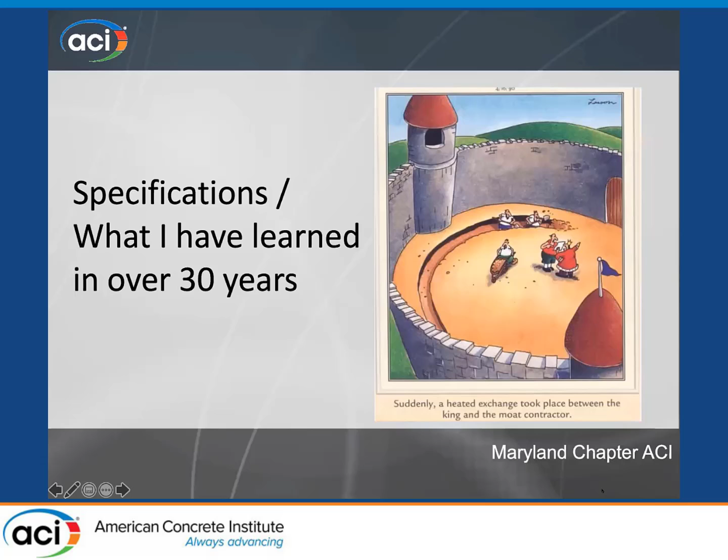When you take a look at this old cartoon, suddenly a heated exchange took place between the king and the moat contractor. They're building the moat inside. I've written a couple of these specifications that ended up with the moat inside the castle. I've seen a couple other ones. And I want to go through kind of some case studies of history of the things that I've seen and kind of how that shaped my mind about how specifications should be written. And hopefully it's interesting.

So I started my career off here at Maryland State Highway Administration, I guess professional career after I became an engineer. I did a lot of work in construction before that, and a lot of my family are contractors. So I kind of grew up in the business, but my real professional career started here, and it's a really good place to start for any young engineer. You get a lot of experience from a variety of different types of applications, soil, asphalt, concrete, and I ended up kind of by mistake into the concrete world.

I guess many of us could sit here saying, you know, when you're 5 years old, you didn't say one year I'm going to be a concrete engineer, and that's what I'm going to guide my life toward. You kind of fall into it and find out it's a good thing.

How long ago was that? Well, it's that long ago. Every one of these gray hairs in my head is a specification that I've written that somebody isn't following today.

Now, I'm not this old. I wasn't around when they did the great roads back in the 50s and the Eisenhower highway system was built. But the guys that taught me were largely around at this time, early on, the old state guys when I came on board. And they had grown up in the Wild West. When they were building these roads and the beginnings of it, there weren't a whole lot of specifications. And the ones that were written, there wasn't a lot of enforcement of it. And a lot of things were being done that were being done improperly. And these guys were tough, but they were tough because they lived through some interesting times. And they had to write the specifications, and they had to make sure that they were enforced properly in order to build the roads that we enjoy today.

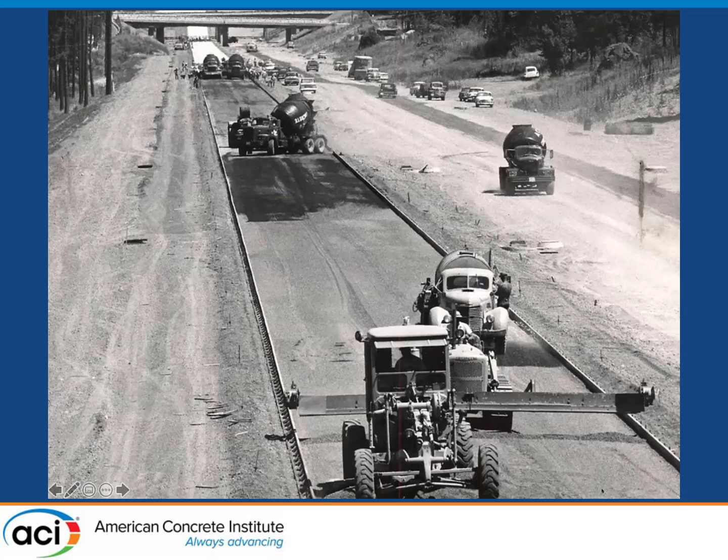And I have a tremendous amount of respect for them. But early on, these guys really shaped how I thought about how a specification should be written and how it should be enforced. And it was very black and white. It was, these are the specifications.

This is the old Maryland State Highway spec. It's actually a little bit updated. I think we only had about 8 mixes when I worked there. The specification was 90210. And for years, I told everybody, and still do, that I wrote for 90210.

And so a young engineer came in. I'm in the materials section. I'm going to work there until something better comes along because I really want to be a design engineer. And they teach me these specifications and they get you to memorize them. And I worked in materials, so they're very much into what the material should be. And then they send me for a year out in construction to see how these specifications are used out in the real world.

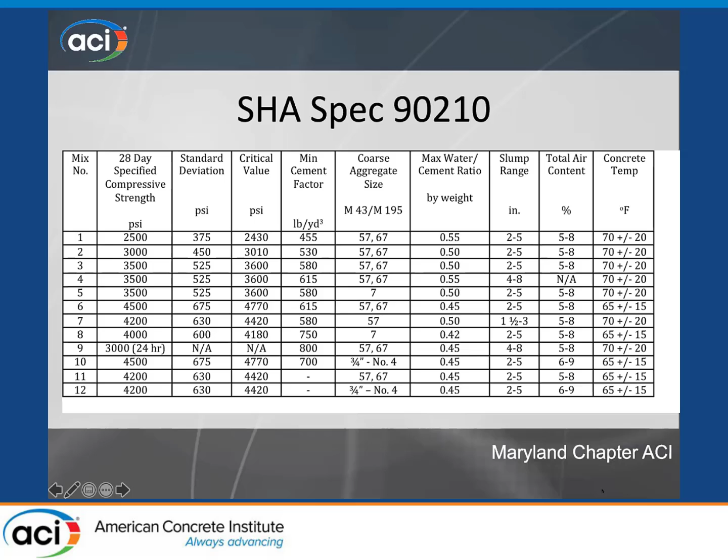So my first month out in construction, you really, unfortunately, and this is true to today, most engineering programs do not teach you a whole lot about concrete and the tests for concrete and what they mean and their importance.

So one of the engineers at the field office, State Highway, took me out on this job. It was out on I-97, if you're familiar with Maryland, right up around Annapolis. He took a slump cone out, and with no concrete at all, standing in the parking lot, he said, 'This is how you run a slump.' He just showed me very quickly how to do it. He gave me a slump cone, a rod, and a tape measure, and sent me out to inspect the footing.

He said, the concrete trucks are going to come. When they come, you run a slump. You know what they need to be within. And if they're out of spec, you send them home.

So the first truck pulled up and I measured the slump, and it was a half inch over the specified maximum. I told the truck driver, okay, get it out of here, it's out of spec. Now, I think they're not sending me out to anything important because I'm a new guy and I really don't know what I'm doing. It was probably a foundation for a signpost or something like that. And I'm all by myself with one other guy doing this.

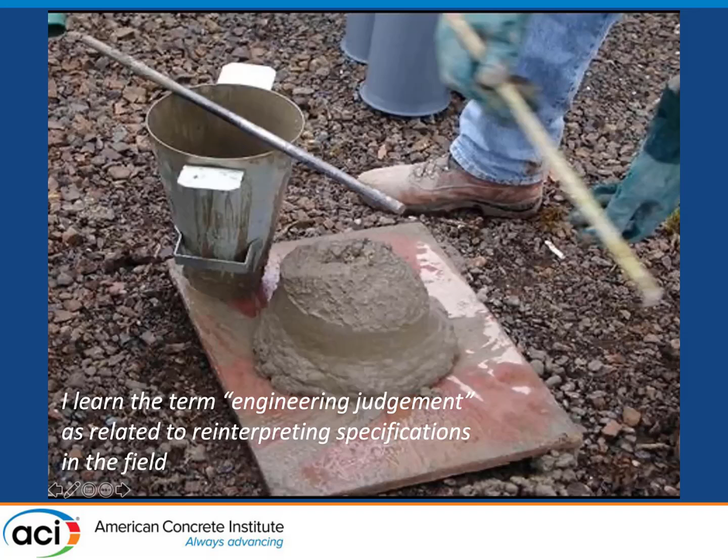So I guess at a very early time, I started to take a look at these specifications and saying, there's some wiggle room in them. And could this have been written more clearly for the application that I was looking at? It just starts you to wonder.

Came back and I started to work in research, and we had a very interesting project that really is the thing that pushed me onto my career as a concrete engineer. This project was, we were experiencing a lot of bridge deck cracking, and it was early on, and they were mostly transverse. You would have, on the worst decks, one every foot. Usually you'd have a longitudinal crack that went down. So my job was to go out and measure all these cracks in the bridges, map them out, and try to determine what was causing them.

So I wrote a report on it. My recommendation coming out of the report was based on me talking to every one of the older engineers that I knew and explaining what was going on. So when I say it was my recommendations, it was really a lot of smart guys that were helping me out with this. But we collectively felt that there was a curing problem going on.

And so I talked to some of the other state highways to find out what they were doing. And I came back with — there's a method of curing, and it's called fogging. And we really should be getting into that and see if that'll straighten things out. So they said, that's great, go write a specification on it.

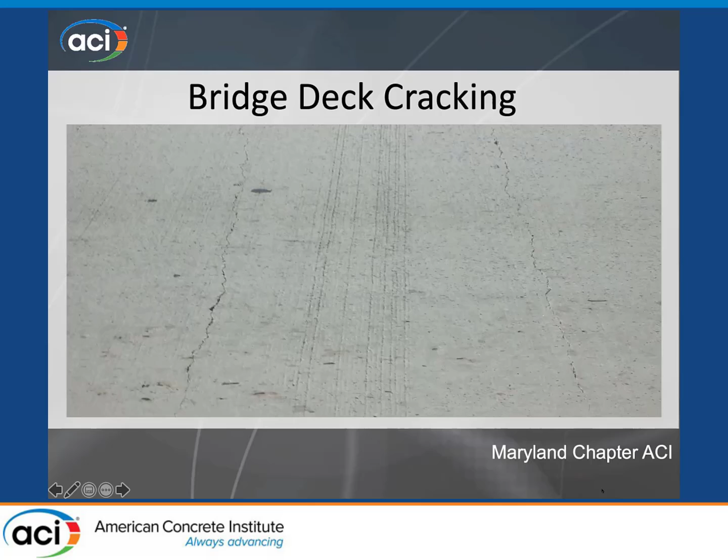So I did. And this is what was in my mind when I wrote this specification. I think I had something about atomized water molecules flying out of the thing and creating a mist over the concrete, a fog, raising the humidity above the concrete. I had all this stuff in it, and I just thought it was great.

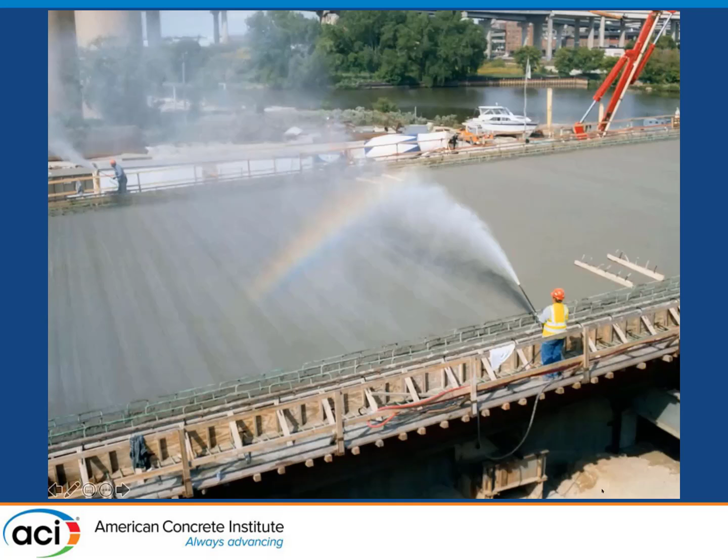And my first spec didn't really go so well, because when I went out to see if people were actually doing this, I found out that mostly people were using garden hoses and calling that an atomized spray.

I went out on every bridge deck over a 4-year period that was placed in Maryland, and you walk out on the job and tell people, no, this isn't what I intended. And they go, well, that's interesting. What do you mean by atomized? Can you tell me what that is? And they started to pick that specification apart. I realized that what I had written was really not very good. It was confusing to everybody, and it was open to interpretation from the contractor that could take us down some bad roads, where they were really adding a lot of water to the surface of the concrete and doing bad things to it.

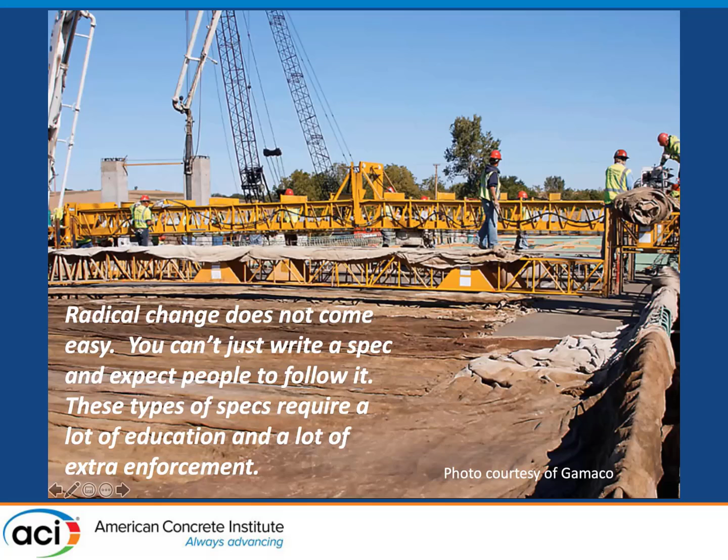Another thing I found out, we had a guy come in who was a very good salesman, and he sold us on superplasticizers, high range water reducers. These were the old style, old generation high ranges - melamines and naphthalenes. Some of them worked good, and some actually worked not so good. His product didn't work very well. But he sold us on it, and we did a little work and it looked good in the lab. When we got it out in the field, it was a disaster. We had horrible slump loss - it would come flowing out of the truck into a wheelbarrow and start to lose slump immediately. It was a nightmare.

I sat out on a couple of those projects, and we wrote high range water reducers out of our specifications. Now it's 30 years since then, and high ranges are still largely prohibited for use in Maryland. I guess that was another thing I learned that helped put me on the side of the fence I'm on today. You need to really know your product, have faith in it, and be very truthful about what it can and can't do. Because if you recommend something and tell people to do it and it doesn't work out, you'll lose your credibility, and you'll probably lose your chance of ever getting back in and doing that again.

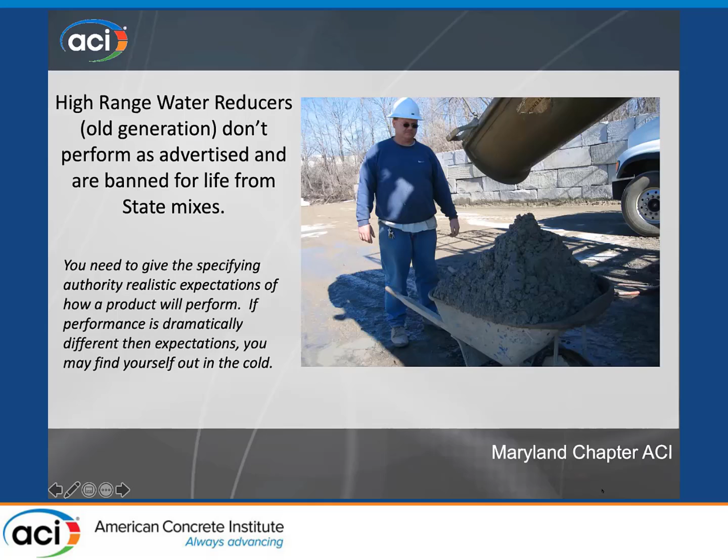When I was with the state, we discovered ASR, which had actually been discovered 45 years before us. I remember I was going to night school at the time, and my professor asked if anybody knew what ASR was. Nobody did. He offered extra credit if we could find out whether we had a problem in Maryland.

I went back and talked to all the guys in the lab - I was still one of the real young guys - and they told me yeah, they knew what ASR was, and explained it to me. But they said Maryland doesn't have ASR, we don't have reactive aggregates, it wasn't a problem. I went back and talked to my professor, and he said, well, you told me what it was, but I'm not giving you any points because I'm being sued right now. He was working on the Washington Metro project, and they were finding ASR all over the place, and they're saying he should have known about it.

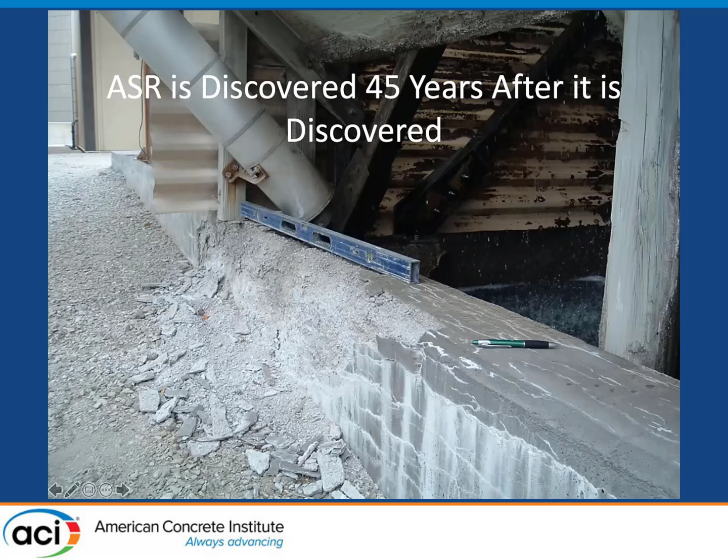So I wasn't the genesis for this, but shortly after, we did find out we had ASR, and we found it in the highest inland bridge in Maryland, Route 68 and Maryland Route 55. This thing towers above the road below - the worst place in the world you could find this problem. They had noticed all the cracking in the deck, ripped the deck up, and redecked it. Shortly after doing this, I'd guess within a 10-year period, they started to see this cracking problem again - that was ASR.

So everybody was spinning around asking, what do we do? I remember somebody wrote a specification saying we will not use any Portland cement where the alkalis are above 0.60. The very next day, we had about four lawyers with four producers of cement in the chief's office ready to sue us for that. So everybody said, okay, we're going to step back from that. Because when you work for the state, you really don't want to get sued - it ends up in the newspapers. You don't want to get sued unless you're dead sure of something, and we weren't dead sure of this.

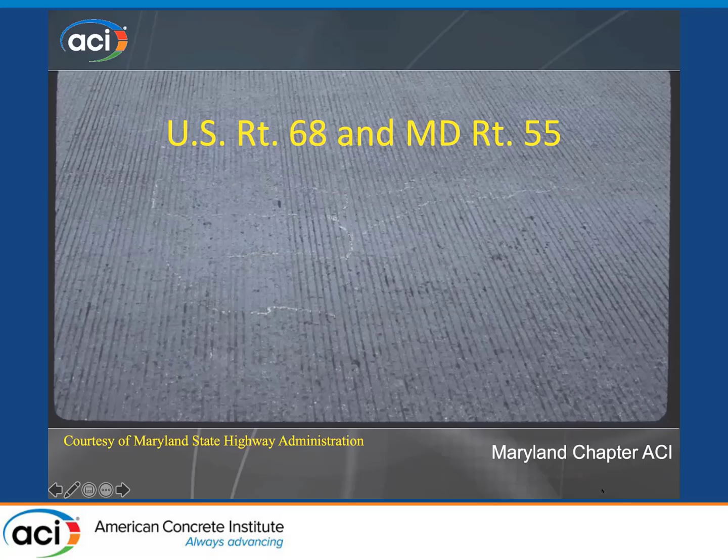So we went back, and there was a Mid-Atlantic Technical Committee in Maryland. If you look at that committee, you'll find Calvin McCall - I think he's behind Einstein somewhere and in front of Schrodinger. Anyhow, very smart people were there. I didn't know Calvin at the time, but I was reading all the notes from the meeting.

We had a real smart guy from our side, John Wiesner, that was involved in that. And these guys wrote a really good guide for how to deal with ASR.

And it was a good time for the industry, because for a short period of time in the Mid-Atlantic, everybody was kind of in agreement about how to address ASR. There were some small differences, but everybody was pretty much on the same page. And it's important for concrete suppliers, producers, and contractors to have consistency in major specifications across the region.

We have kind of a mess today because it's a lot different, but if every state has its own specification, if you live in a small state like Delaware or Maryland and you're a concrete producer, you might do work in 4 different states very easily. And if you're a contractor, you definitely will be doing work across state lines. If you have these big differences in a specification, it becomes a complete nightmare.

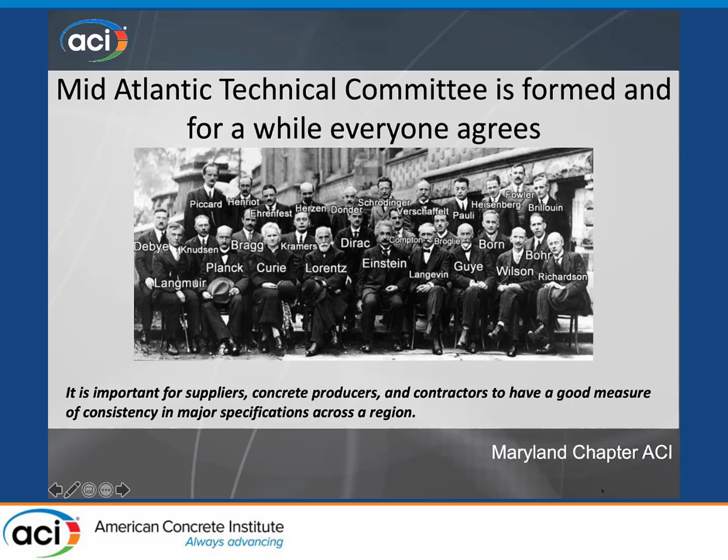I don't have any pictures of Calvin. And that is amazing. When I went through my book, I guess we had some pictures at one time, and we agreed that they were of an incriminating fashion, and we needed to get rid of them. Nobody needed to see us with glassy eyes and cocktails in our hands late at night. So I actually do have those pictures, but I'm not sharing them.

I threw in this one of Calvin and me, early days. Calvin has a tear in his eye, as I do. Blue Circle Cement. I left the state.

I went to work for these guys. I kind of knew what I was doing as far as how to build a bridge and how to build a highway. I didn't know a whole lot more than that. I had a lot to learn.

And early on, I don't know if Calvin remembers this or not, we shared a rental car together. We were up in Albany, New York, and we were driving down to Ravena. I got in the car with Calvin, and we started to drive, and Calvin started to talk.

And I realized that Calvin was one of these smart guys that you really, really wanted to know and become friends with. I don't know if Calvin remembers this either, but he told me, you seem like a nice guy. I'm not sure if we're going to be friends or not, but I will do anything I can to help you. And I am very glad to say we are friends, and we always have been.

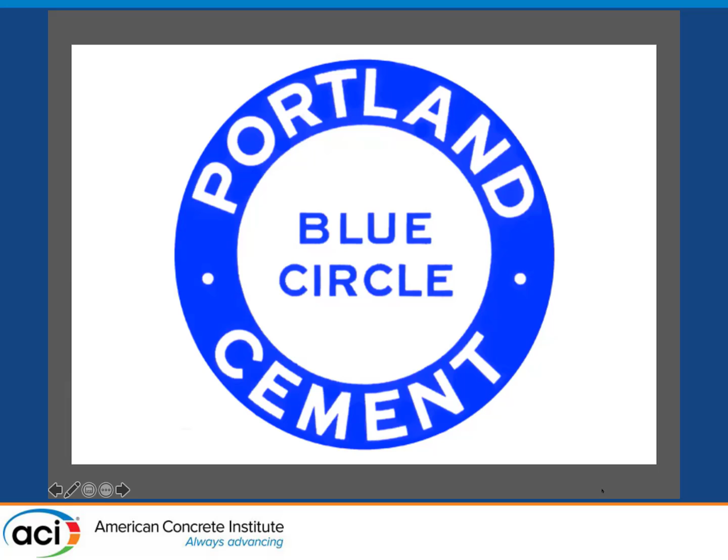We became friends, I guess would be the better way of saying it in technical language, good friends. And Calvin has helped me throughout my career. So I'll give a little side here on Calvin.

Calvin's smarter than me, and that's most people are. Calvin's a lot smarter. And it was kind of interesting early on because I didn't want anybody to know how dumb I was and how much I needed to learn. So Calvin would start talking over my head, and I would change the subject when it got real far. I thought, I don't want him to figure out how stupid I am right now.

And then one day I was talking to Tom Green, and I asked Tom, do you ever have these conversations with Calvin and you just start to lose it? You don't know where he is anymore, and it's just way over your head? And he said, yeah. I said, well, I always just change the subject. What do you do? And he said, well, you're an idiot.

He said, if you want to learn something, Calvin's the guy to go to. And he said, when he starts talking over your head, you can tell Calvin, stop, I don't understand what you're saying anymore. You need to explain this to me in terms of beer.

Now, that to me is what makes Calvin the most remarkable person that I know, because he does have this genius side to him. But the more genius side is that he can explain nuclear physics to you in terms of Heineken's and Sam Adams, and you'll understand it at the end.

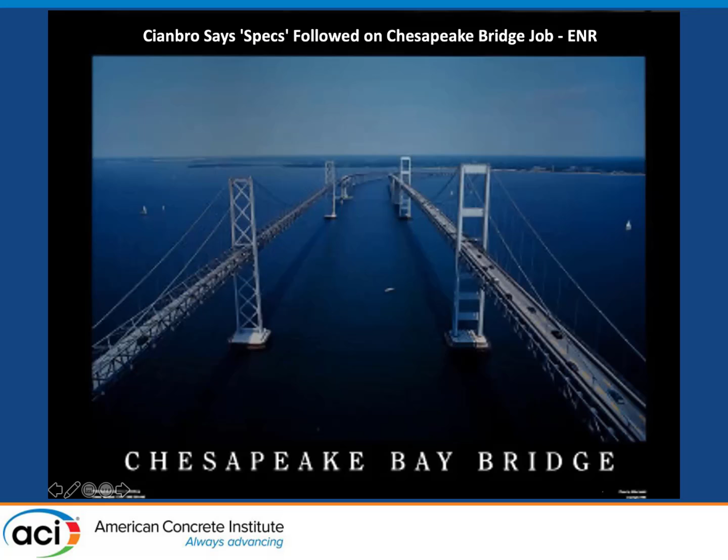The engineers on this project, who were very good, were trying to do something that was going to be better than what we had done in the past. They used silica fume concrete and a whole lot of other special things. What they were trying to do was build a Cadillac, and what they ended up doing was causing a problem. They went back and made the adjustments they needed to, and it got fixed.

I dealt with the guys on the next project, and that's why I know they were very sharp engineers for the state. We had this project on I-95, I-695, with a lot of mass concrete. The concrete was placed in the summertime and the wintertime - it gets real hot in Maryland in the summer, and cold enough in the winter.

I've dealt with slag cement and mass concrete for about 30 years now, and they wrote one of the best specifications I've ever seen for using mass concrete with slag cement.

Problem with slag cement is you get all the strength that you want, but when you get cold temperatures, you don't get the strength early on in place in the structure. So stripping forms becomes an issue, and you can slow the project down.

They figured out where the temperature differential was, which was a lot broader than what I would have given them, but through a lot of good engineering and design work, it worked very well. They allowed a higher differential in the wintertime by tying everything to the ambient temperatures. If it got below a certain temperature, they knew the concrete temperature was going to be cool enough. It was one of the best projects I ever worked on as far as mass concrete—very easy for the contractor, very easy to understand. No arguments on this project. It worked great.

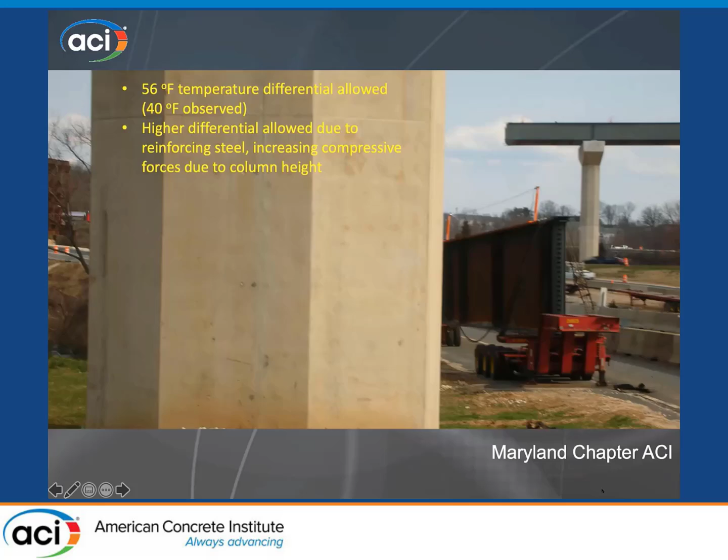Worked on another project, the Woodrow Wilson Bridge, another one with a lot of mass concrete. Initially they specified 50% slag cement in it. We talked to Virginia DOT and Maryland DOT—they're very good partners to have—and they very easily changed this specification around.

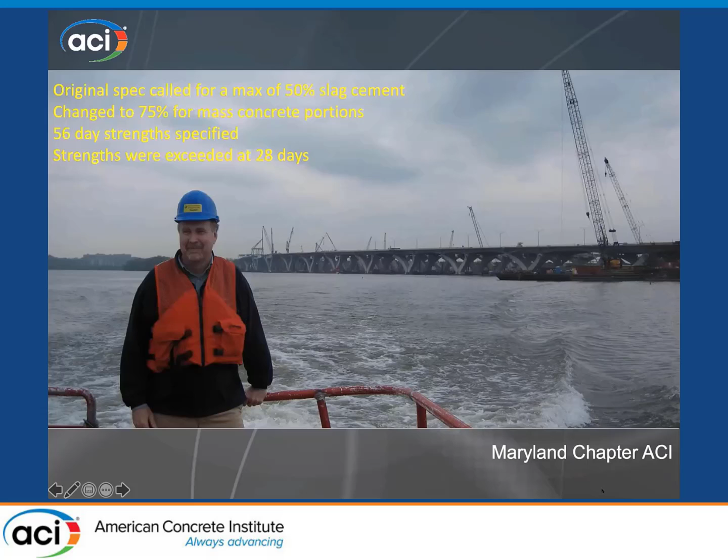This was one of the projects where I really got to meet and work with John Gajda, one of the experts in our country on mass concrete, and it later led to working on the ACI 301 committee. John said he thought we should have a thermal control plan required on these mass concrete jobs, and I completely agreed with him.

That project was one of the things that kept it in my head, because they were about to go down a road that would have been bad for them. It's a good thing to stop beforehand and say, we have something different, something special on this project, and we need to address it. That's all that this thermal control plan does—let's take a look at what we've got and let's address it.

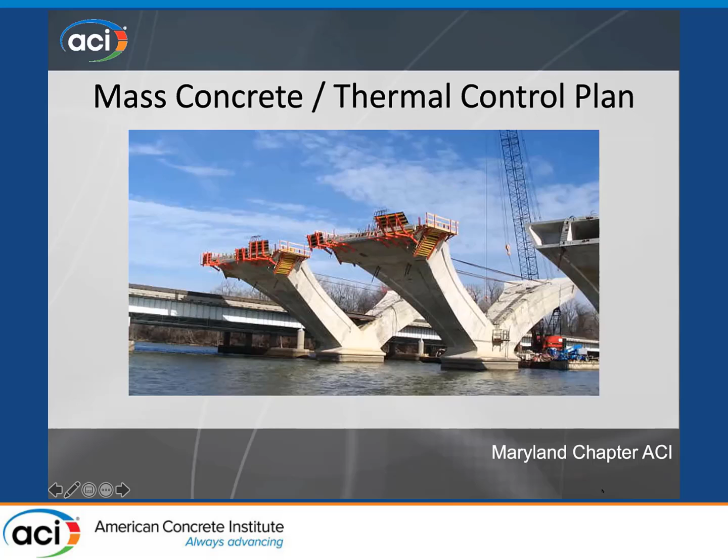I've run into a lot of things like this today, and they're hard. They are mixes where they have coarseness factors and workability factors, and there are a lot of fibers and a lot of mixes going out.

When you run these mixes in your laboratory, a lot of them will look ugly. And when you talk to a contractor that has used it somewhere else, they say, well, I did fine when I was out in Ohio. I don't think people realize that the materials in Ohio are different than the materials that we have here. I can't match these perfect gradations that people are sending me. You do the best that you can, and you really struggle with this.

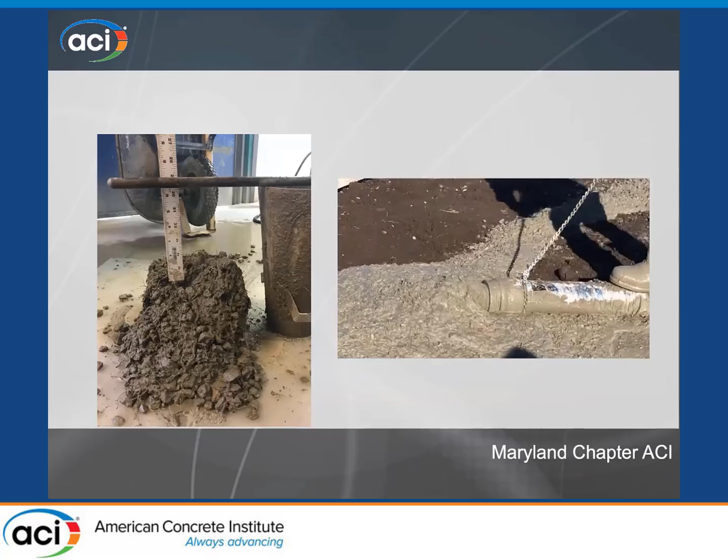Let me see if my video works. You have something that's ugly like that, and this is what the contractor wants. Somehow you need to work between the engineer, the contractor, and the concrete producer to make something like this work. To do that, you need to have that engineering judgment—the engineer on the other side that designed this needs to work with you.

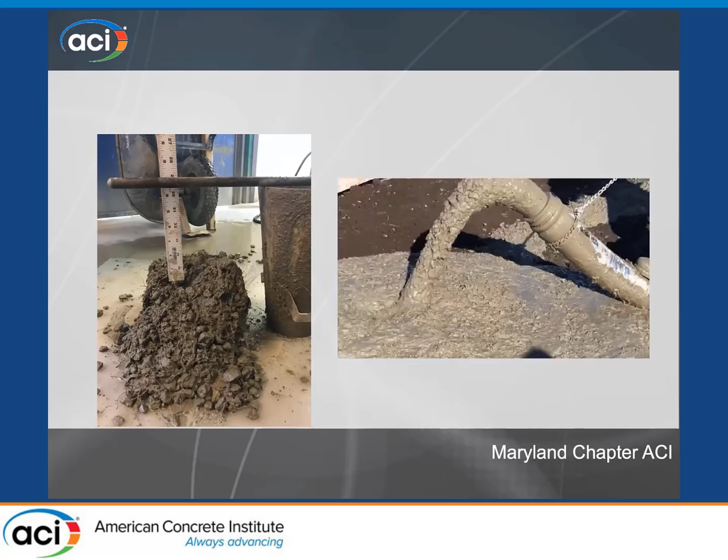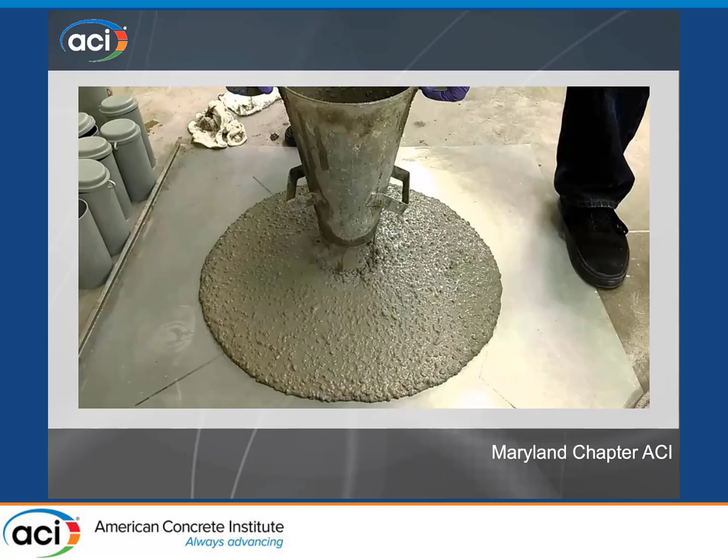There are projects that go on with this too, and I actually like to do this. Anytime you can flip a slump cone upside down and you don't have to rod it, it's a good time for me. But you want concrete that will flow throughout a form. A lot of times you're looking at something with a very low water-cement ratio, and these mixes get a little bit strange.

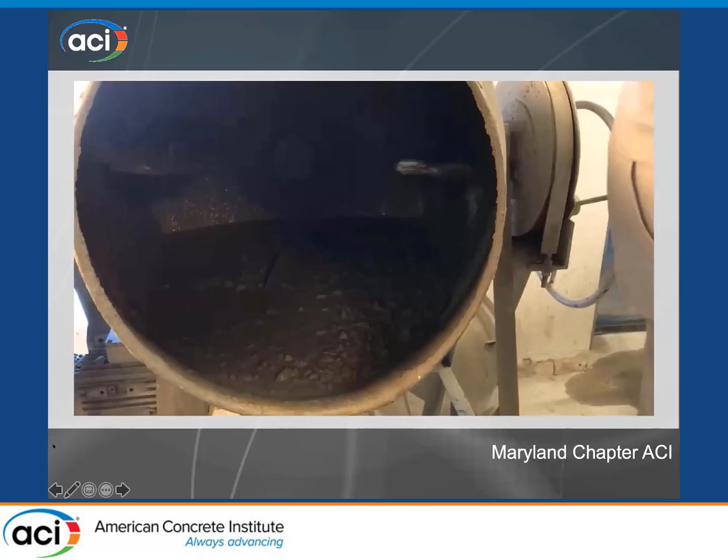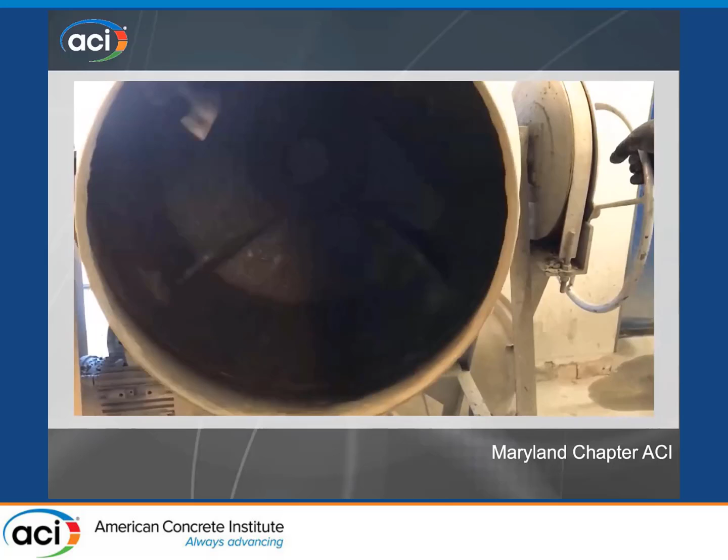Here's one of the mixes that I had for one of these projects—these are 100-year service life mixes. You see my buddy laughing at it. This is the mix that they wanted out there, and this is the mix that they're going to pump out on the job site.

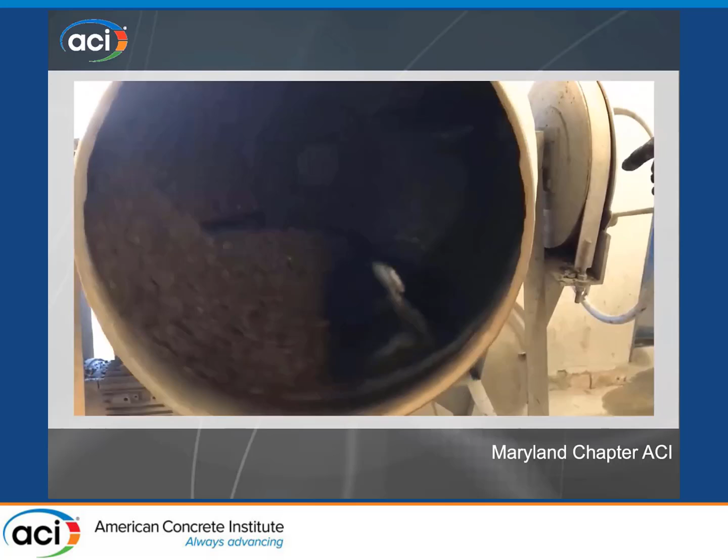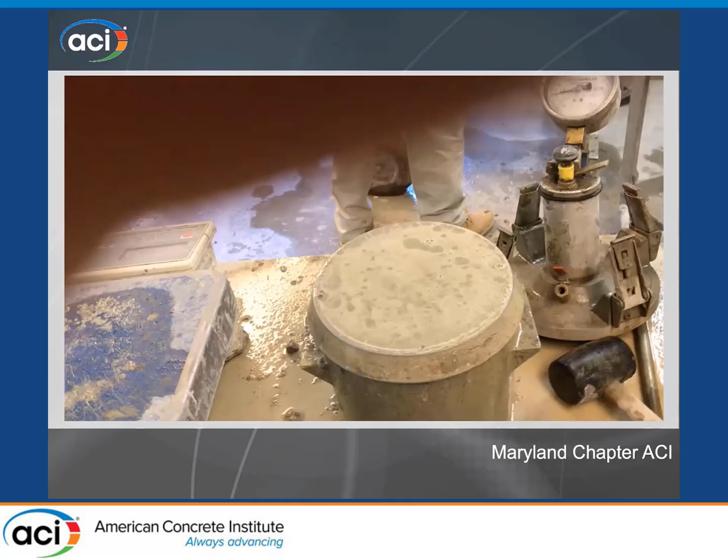Let's try to see if I can wait until it becomes concrete. I don't think we can wait that long, but you can kind of see the waves starting to appear. So you're batching this concrete out in the laboratory, and you're just wondering, how are they going to place this concrete in the field?

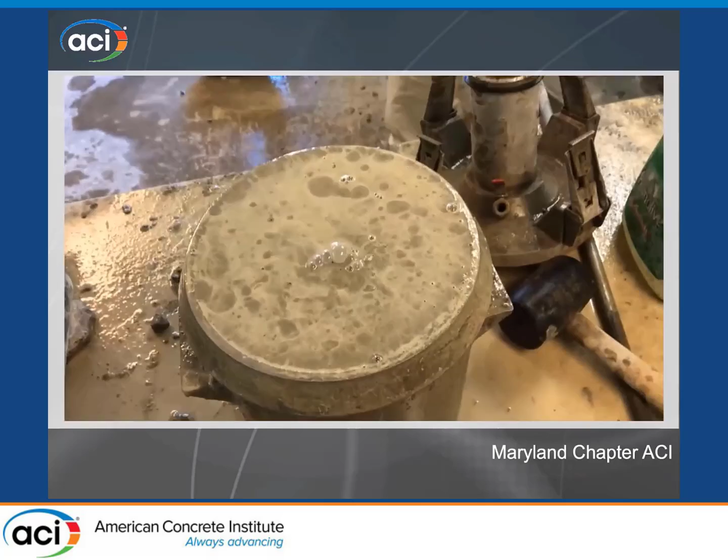That's as hard as I can push down into the concrete. It's a little bit tough. And then you make cylinders with this stuff, and it gets to be ugly looking. And you're wondering, how is this stuff going to flow in the field? How is it going to consolidate in the field?

There's a lot of projects that are set up for over 100 years. And theoretically, a lot of people have come up with ideas how to do it. I think there needs to be a conversation between the people that academically are putting a lot of these mixes together and the guys in the laboratory that are doing this.

I remember the last ACI convention we went to, there was a lot of discussion in one of the sessions. It was a very good session, about how to make these mixes. A lot of people theoretically got up and talked about how to do it. Then there was a contractor at the very end, and he said, all of that kind of works, but in the end you need to sit down with the guy in the laboratory that is mixing this concrete together, and figure out how to make it work out in the field.

So I think it's one of the things that we probably as an industry need to do a better job of, having that conversation and sharing the knowledge from the academic side of how these mixes should go together, and from the realistic contractor side of how am I going to pump this concrete, and I don't want to have any voids in this concrete when we're all done.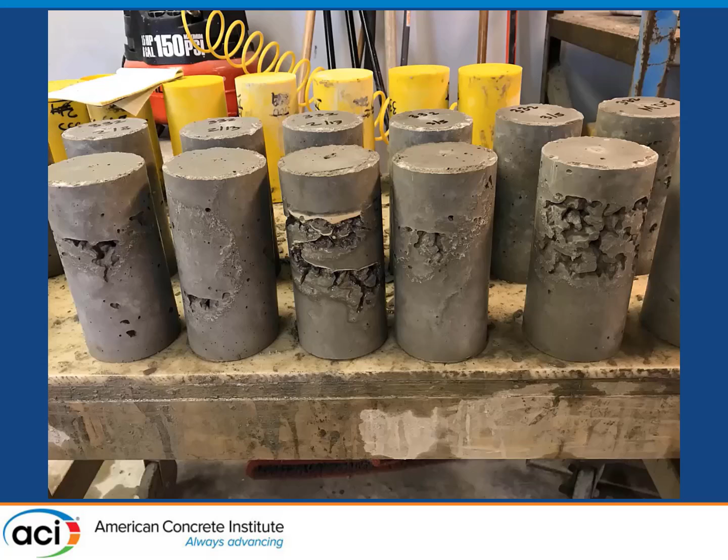All right, so how do I address specifications? First of all, I'm going to jump in real quick. I'm almost at the end in case the timekeeper's worrying. I think I'm ahead of time though.

I was kind of working happily along in my life, and I would come to ACI and attend sessions, but I really didn't work real hard, and I probably enjoyed the social aspect more than I should in a lot of cases. Then I got a new boss, and he wanted me to be on committees, and I said, Calvin, can you help me out? Because Calvin is the guy at ACI.

Calvin said, well, I can get you on 301, but you're going to have to work. That worried me, because when Calvin says you're going to have to work, you know you're really, really going to have to work. So I said, well, okay, I would appreciate that. Calvin got me on that, as well as some other committees, and he put me to work.

My hope was, you get onto 301, it's a very intimidating committee for an outsider. And once you're on it, you realize that everybody on this committee is very nice and very decent people. They beat you up, but they laugh while they're doing it, and everybody's friends on the outside. But they're very smart people. And you're walking in here with your limited knowledge, and you have trepidations about getting up and talking in front of this group.

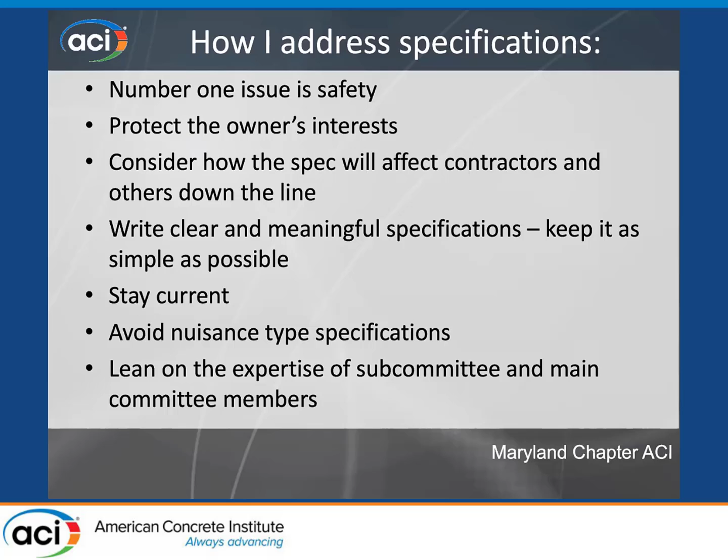I really feel that avoiding nuisance type specifications is very important. Since I've been on there, a lot of good work has been done at pulling out the type of specifications that really don't mean much but cause a lot of headaches, and leaning on the expertise of the subcommittee and main committee members. So I always try to surround myself with the smartest people I can, so they will carry me along to what I need to do.

An example of this, a simple one, goes back to the first test I ran out in the field, and that's slump. We used to have a range, and this is what you needed to do. Right now, the way we rewrote this is the contractor and the ready-mix producer need to talk about what kind of slump that contractor needs, and they get together on that and work out that target slump. I think that is a really brilliant way to use a test method, this is what it was intended to do.

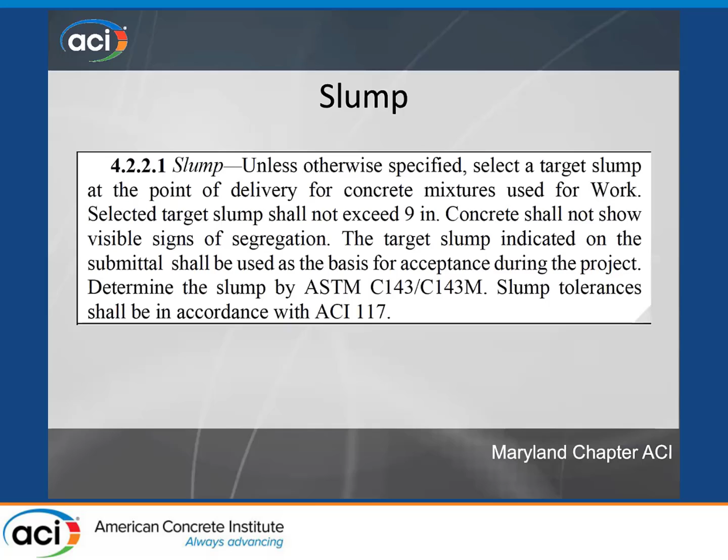We wrote a specification on ASR that was a tough one to write. We took the guide from ASTM, which is a little bit difficult to go through, and there are different avenues you could go down in this guide. Some of them are ultra conservative that would have really locked up a lot of our construction. Some of them are very commonsensical, and conservative, but you have to take a look at writing the specification again over vast regions across the United States.

Can we do this? So we wrote a specification that's very straightforward, and you have different options. You can use non-reactive aggregate, you can test by ASTM C1567, or you can limit the alkali loading of the concrete. Pretty straightforward. And we give them an out, that they can go back to C1778 and come up with something different if the engineer chooses to do so.

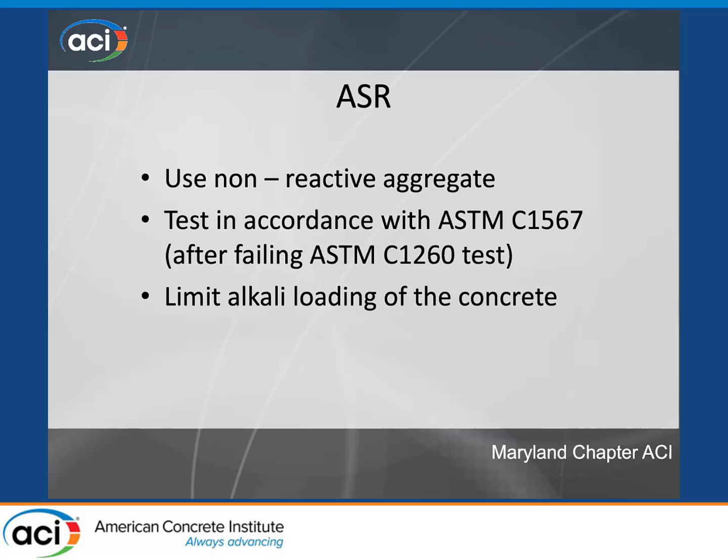I really like it because we took something that was kind of complex and really simplified it down, but we kept the guts of it. We kept the safety factors that we need to, and we're looking out for the owner. It's important because when you take a look today at where ASR is, it's all over the board. There's a million specifications on ASR. It can be very confusing if you're out in the field working with multiple states.

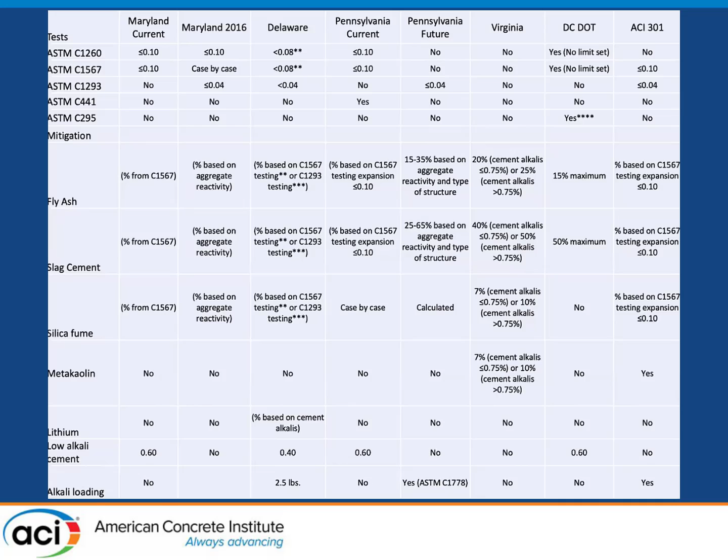To end with this, I want to talk about specifications and enforcement. One of the things I see today is we're going down the wrong road as far as enforcement. I'm seeing some strange things out in the field. Michelle talked about Calvin wearing sandals at a meeting. When you're wearing sandals doing a slump test, we're going in the wrong direction. And I see that a lot.

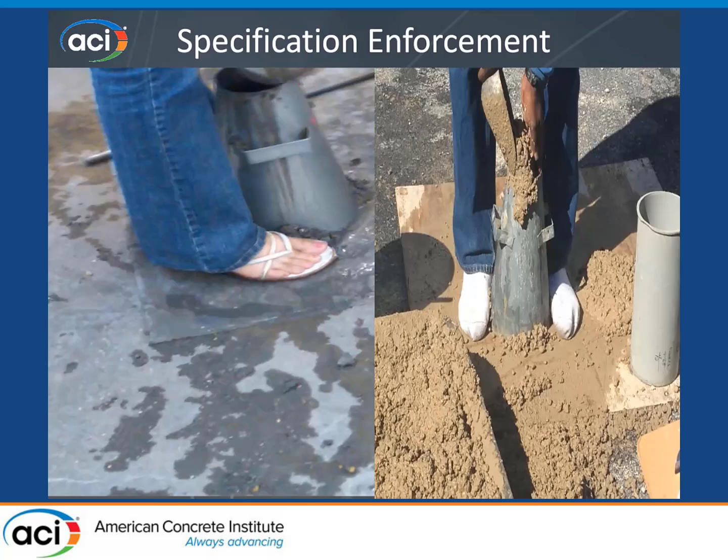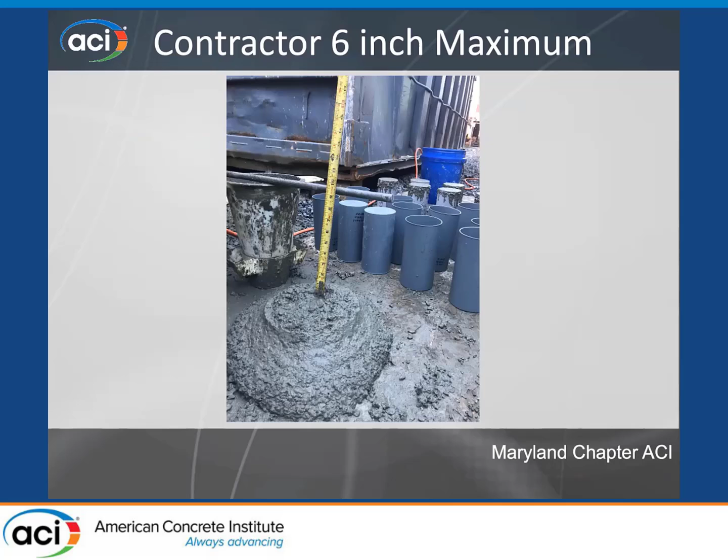As I get old, it frustrates me when you're looking at, this is supposed to be a 6-inch maximum slump. They were having strength problems on the project, and they were allowed to go much higher than that. And of course, this is where the strength problems happen, because you're adding water to the concrete. So I see a problem with enforcement today, and I think we need to do a better job with that.

I should have ended on a positive note, that was kind of a downer, I'm sorry. So that is my presentation.